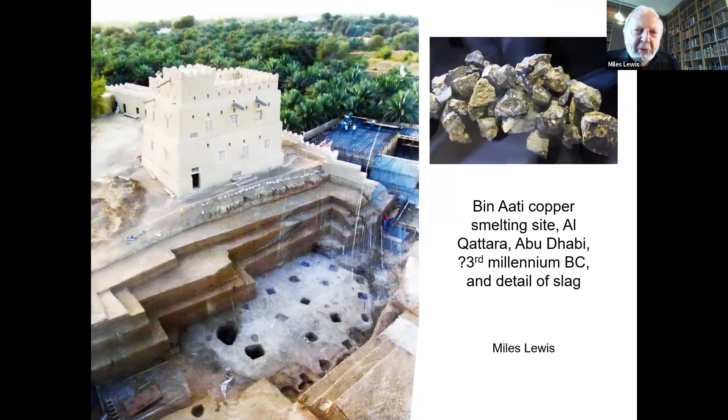But the next step is making bronze. Bronze uses copper and tin, but it's harder than either of them—that's the benefit of it. Whereas copper could hardly be used for anything much in the way of tools, bronze could be used for tools and weapons. So the first thought somebody would have had was not to do with buildings, it was to do with how to improve weaponry, maybe jewelry, some utensils and so on.

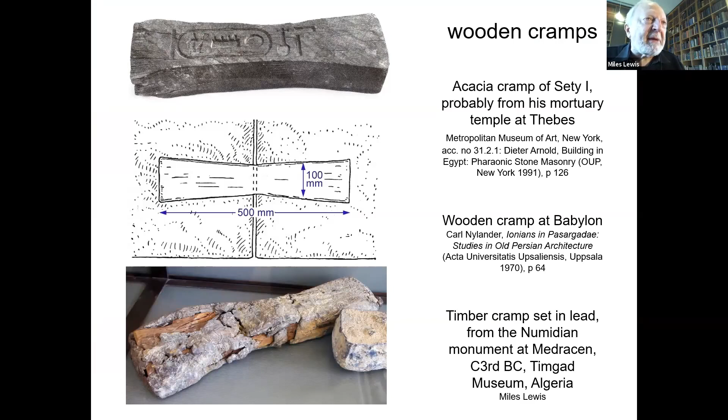And here's where metal was first used in building. Stones were joined together by cramps—those double dovetail shapes—which at first were done in timber. There's a timber one at the top, and they sit into the recess there, so the stones couldn't pull apart. Around the timber was run lead, so you got a tight fitting. In fact, the use of lead in building was perhaps the pioneering use, and that's probably what gave rise to the idea of using bronze in these locations, because the timber cramp might then be replaced with a metal cramp, possibly with other shapes.

And you fit it tightly by running lead around it. So this is the idea people would have had about what metal was for - no idea about it being something you could use in tension or to beam or anything like that. It was only gradually that the implications arose.

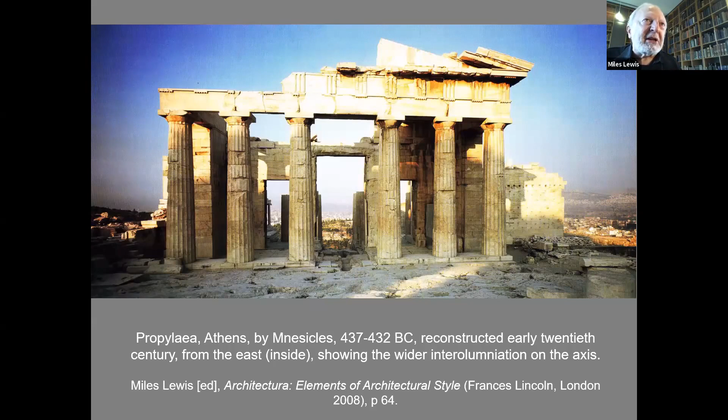Bear in mind, to go back again, what we saw was a reconstruction - the whole place was in ruins, rebuilt mostly in the early 20th century. So we don't know exactly which stones are right. You can't go to one stone and say this is how it was in this place. There's been a certain amount of supposition about what went on here. Those stones were put back in place on this side, the inside face of the Propylaea.

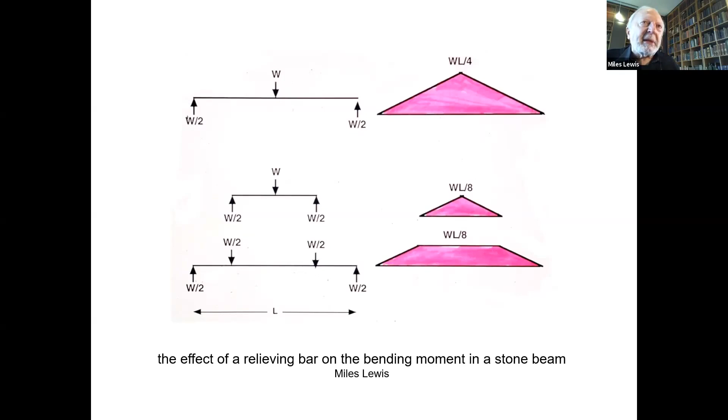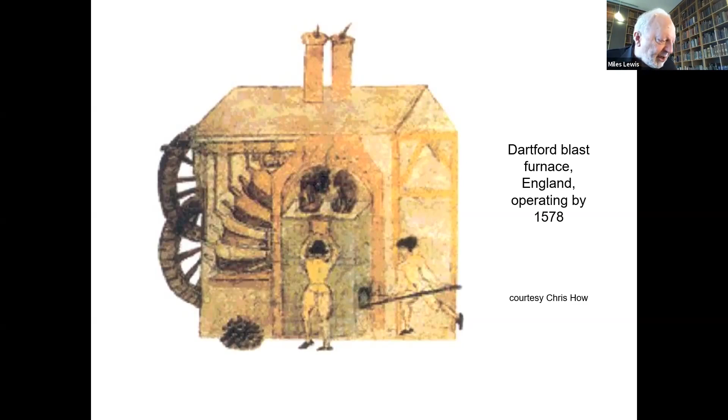The next development is the blast furnace, where you force a blast of air through the furnace and achieve greater heat. Because of this greater heat, you can produce fully melted iron, which is poured off and becomes what's known as cast iron. Now I need to explain a little more about the different sorts of iron.

Cast iron is what you get straight away by melting down the iron ore, and it's not refined—it's got impurities in it, up to 4% carbon and maybe all sorts of other elements like silicon. It's poured into a mold, like pouring out a block of chocolate, and it sets in the shape of the mold.

It has a crystalline texture, and it's good in compression but not good in tension, which means it's not good in bending either, because bending involves tension. It's also brittle, so if you have a fire in a building made of cast iron and hose it with water, changing the temperature, suddenly the iron pieces will collapse. That's cast iron, the basic cheap iron you get first of all.

Wrought iron is where that iron is worked by a blacksmith or a rolling mill. You hammer or roll the iron, and as you work it, it gets a fibrous texture. It becomes good in tension and good in bending. The only problem is it's much more subject to corrosion, to rusting, than cast iron. But wrought iron is much more general use for structural purposes.

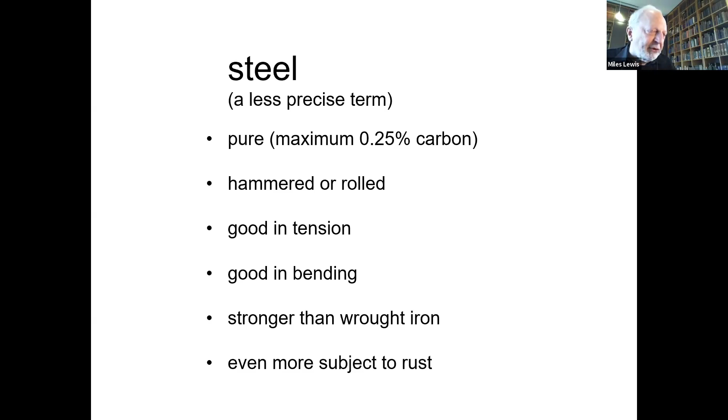Then the third thing is steel, which is a bit hard to define. It's more like wrought iron—hammered or rolled, good in tension and bending, but stronger than wrought iron. It's even more subject to rust. It involves various additives, and steels were made by different recipes over time; I won't try to define those more precisely. But essentially, by the late 18th century, you could have cast iron, which was cheap, or wrought iron, which was expensive, and that's what was first introduced into buildings.

The buildings it was introduced into were two sorts, really: the factory—the first factories—and iron bridges. I want to turn to the factories first. The factory was a new idea, the heart of the Industrial Revolution, involved in the rise especially of the cotton spinning industry and some other industries like flax.

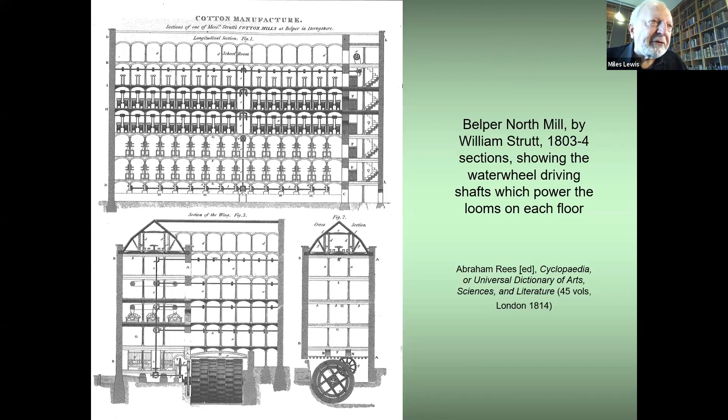Here's another one, and you can see here, looking at the bottom sections, the water wheel which operates the whole thing. More clearly above, you can see the shafts which power the machinery above. The other thing you can see, if you look at the left-hand bottom section, is the arches in the roof. Now, the big issue here was fireproofing.

In the year following that, about half a dozen factories and mills in the north of England were also burnt out. So suddenly, fireproofing became the major issue in the design of factories, and that's what generates the developments in William Strutt's mills at Derby.

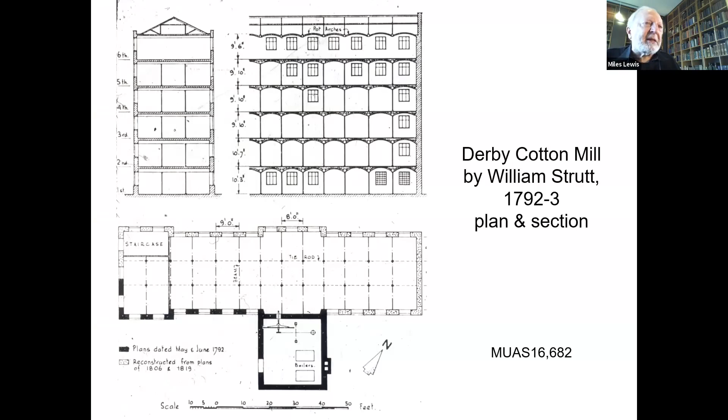There are three of them. This is the main Derby mill, not unlike the other ones we've just seen. In this case, there's a steam engine at the bottom, where the boilers are in the bottom picture, the black shaded bit, but it otherwise works in the same way as the water-operated factories.

As I just described, these arches would have all been in a row, but there was only an ordinary wall at the end, so they would have actually flattened out and spread, and the whole building would have collapsed if it hadn't got that iron tie rod.

The tie rod is the key element here, or two elements actually. The tie rod is of wrought iron, not cast iron. The other piece of wrought iron is the sheet metal over the timber fillet. So all the big pieces are cast iron, but the small high-performance pieces can be wrought iron.

What's the problem in this system? Why is it not fully fireproof? I've got all the time in the world. Well, the rod is exposed, isn't it? Yeah, but you're cheating, you know this, Giorgio. Oh, okay, sorry.

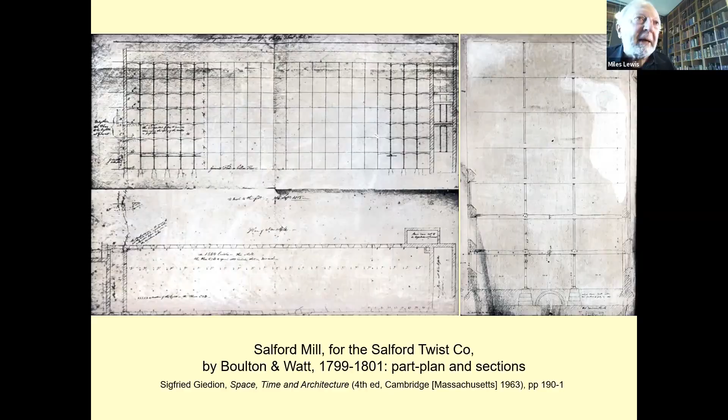If you look at the section on the right, the beams aren't a strictly parallel or uniform shape. There's a rather odd system—there seems to be a change in profile, and in the middle span you can see the black mark where the beams seem to join together. So the beams are, in fact, 1.5 spans each, and they differ in depth as they cross. Why is this? It doesn't make sense.

Well, if you take the beam over 1.5 spans, you actually get an improvement in spanning capacity because it has a negative bending moment over the span. If you draw the bending moment diagram, you reduce the bending moment in the beam, so that's in a way quite a good thing. They've also got some sense of what the bending moment is doing, because the beam is deeper at the middle of the span. But they haven't reacted to the negative bending moment at the column.

The other thing is that they incorporate into the beam itself the skewback, the element to support the brickwork. At Shrewsbury, the one we just saw before, those beams had a sloping bottom. So where previously in the first mills we had a little bit of timber wrapped up in iron, the iron beam is now shaped so it can take the base of the brick arch. In this next mill, Salford, there was a little bit of that slope but also a little flange, so the brick rests on the flange as well. But that was scrapped—in the end they just used a sort of long T shape, so the brick relies upon the flange to support it.

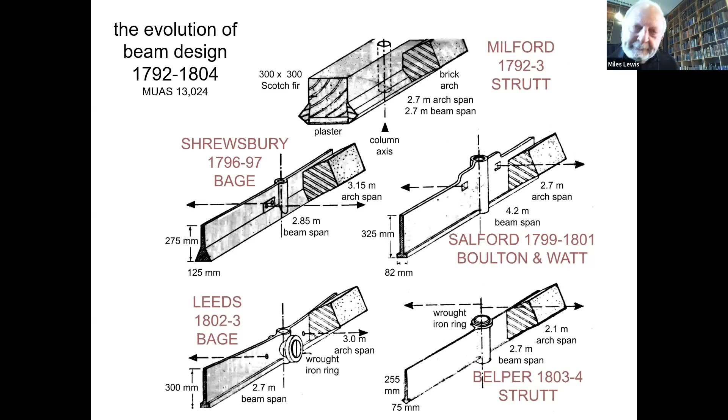The other thing happening, if you look at these diagrams, is the dotted line for the tie rods. By the time you get to the bottom one, the tie rod at Belper has been raised right up above the arch, and of course that's to stop it being exposed to fire. There again is the evolution of those beams, more and more towards what we might regard today as being perhaps a more scientific I-beam.

Now, the other topic I wanted to mention was bridges.

Well, sorry, can I interrupt before you go on to bridges? Just a fascinating topic, by the way. Back on the previous example, so we start to see the development of the I-beam.

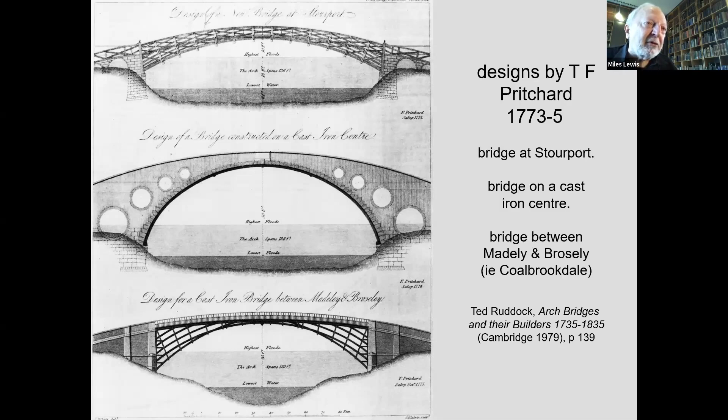I'm stressing this because these ideas from stone bridges and wooden bridges come to inform the first design of iron bridges, because people are traditionalists. They can't think of a new form straight away. Now Pritchard at the bottom proposes quite a good bridge. Although the bars are curved, they're not very heavily curved. He's obviously inspired by the timber bridge form at the top, but he didn't in the end get the job. It was passed on to another person.

And there's those circles. Now the circles there, what sense do they make? They're not circles to release the pressure or substantially reduce the load. It's just out of the tradition of stone bridge building.

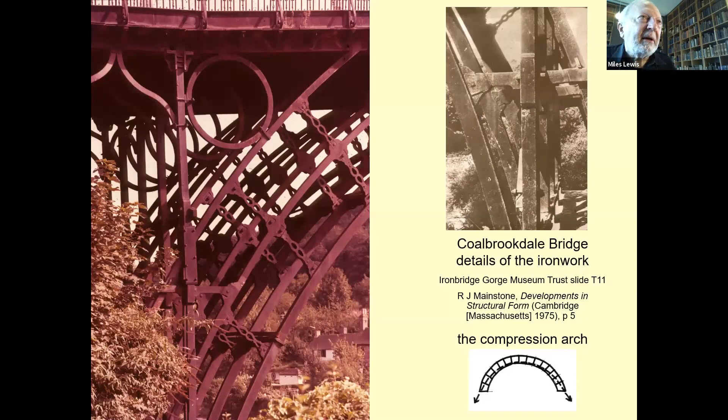But that's the first of the iron voussoir bridges. Now the voussoir is in the stone arch, the wedge-shaped piece of stone which makes up the arch. An arch is made up of a number of these voussoirs, these blocks of tapered stone. And the iron bridges tend to do the same thing. So that last one we can see as being like if you made a number of blocks of stone into an arch. Those separate units are like stone blocks in principle.

Now it's a cast iron bridge with curved bars, but because they're all joined together, it's not such a problem as the Coalbrookdale Bridge we saw before. It's a bit more rational. In fact, it may not all be cast iron. It seems that some of this might have been wrought iron, and I'll tell you why in a moment.

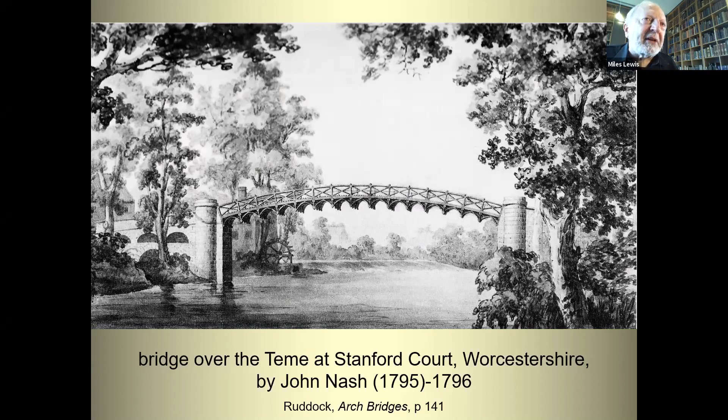This, though, is a bit more of a joke, really. This is done by the architect John Nash, for a private property. You can see it's meant to be a cast iron bridge for sure, but it's a rather quaint structure. In fact, a few hours after it was built, it collapsed, although it did get rebuilt later on. But Nash claimed to be the inventor of the voussoir principle, not exactly in this bridge, but in other ones later on. He proposed cast iron boxes filled with concrete to be made into bridges.

These bridges were over rivers, and rivers were the main commercial connections through Britain. There were no railways, and the roads were poor. Goods traveled by water if possible, either on the rivers or on canals which were built for the purpose. So whenever you built a bridge on a major waterway, you had to allow enough height for the shipping to pass beneath it. If you're in a port, it had to be for sailing ships. Inland, not so much.

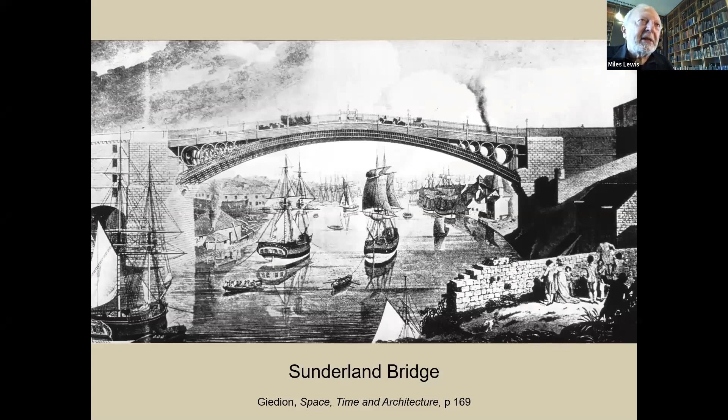Now a different topic. I mentioned the canals. The canals gave rise to the need for aqueducts, that is, to carry the water across valleys. The idea of a canal is you want to transport your goods as near as possible horizontally across the country. So you had to make tunnels where you needed to, and bridges where you needed to, to keep the canal horizontal. If you couldn't do that, you had to have a system of locks where you changed the water level, and boats had to be floated up to the top and down again with great labour. So there's a great incentive to make a canal horizontal.

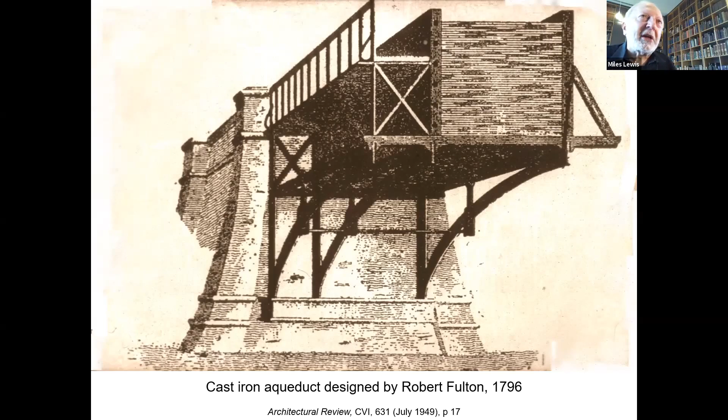You know how canals work. They're barges full of raw materials or goods which go right across the country, and they're not worked by a motorboat, they're not worked by steam, they're worked by what pulls the boat through. Yeah, they're pulled by horses, and that's the tow path on the left on which the horses walk, so it's a critical part of the design.

And he saw this as a new invention. He described this as, let me find the words, a principle entirely new, which he was endeavouring to establish with regard to the application of iron, trying to get other engineers to adopt. So somewhere in this design, he thinks he's invented something rather important.

You think so? Well, not really, because once these are bolted together, it becomes a continuous beam. So it's in fact a continuous cast iron beam, which is not really a good principle at all. Bolting it together probably weakens it. So Telford was mistaken. But Telford is nevertheless one of the most advanced engineers of his time.

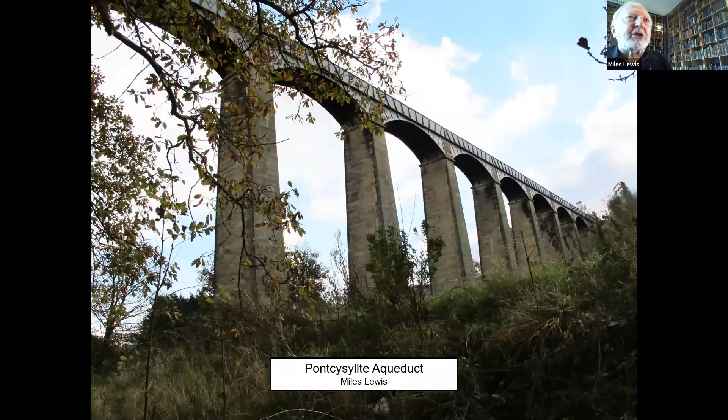He does some of the best designs, especially of bridges. That's a close view of that. And here now is a much larger scale one. That previous one, the Longdon Aqueduct, was more or less a dress rehearsal for this, which is a wonderful structure in Wales. So there's the towpath on the left and the canal on the right. And there's the system. Now, it looks as though you've got this supported on sort of solid cast iron arches, but that's just cladding. The bottom part, the sheets and the spandrel of the arch are just facing. And the system inside is again arched ribs, which doesn't make all that much sense still.

And this was actually begun, work was begun on the banks on either side for the abutments, but in the end, for financial and other reasons, it was abandoned. So it's just a beautiful idea that never got carried out.

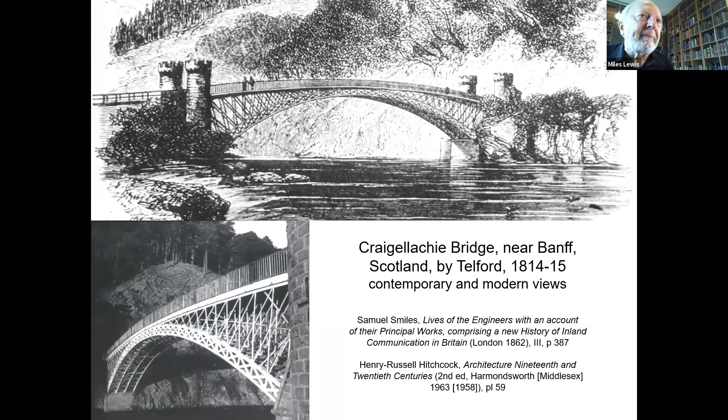And he built a number of bridges on essentially this sort of model. This is the Craigellachie Bridge in Scotland. And some interesting points arose here. It's assembled again out of cast iron, and you can see below the detail of it. And he raises some issues in writing about it at the time.

He makes the point that you should, doing this, have all the elements of the same thickness. Why is that important? So all those bars, he thinks, should be the same thickness. Any reason for that? Like same structural load? So like, does that mean like same structural load, like there's some sort of even structural load or something?

Not so much the load, no. It's because these are cast iron, and if you put it together and you have different thicknesses, after it's cast, it's hot and it shrinks. And as it cools, it shrinks. If it's different thicknesses, it cools at different rates. So the casting ends up with stresses in it. That's the reason for that. Quite sensible, in fact.

And so he criticises other designers who use bars of different thicknesses. He also criticises the use of rings in the spandrels. He's the first person to say those circles we saw in the spandrel of the bridge are illogical. You could tell that they were structurally wrong.

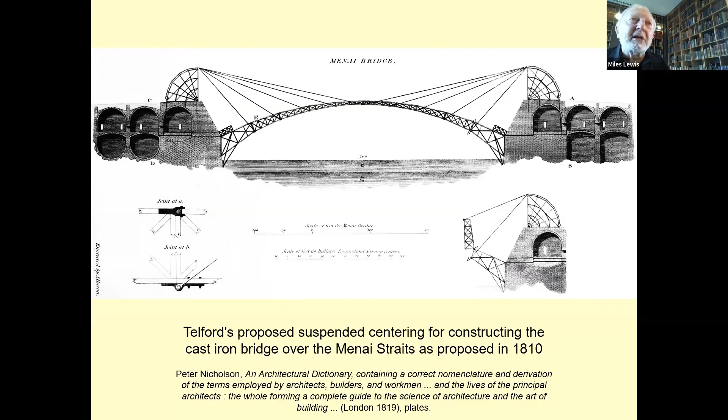Well, I hope you could, because it was done here at Hell Gate Bridge in New York, and it was done for Sydney Harbour Bridge in Australia. So he was on the money there in developing that system.

I now want to turn to suspension bridges, which rely, of course, not on compression, but upon tension. And of course, a very big change in principle. What does that mean in terms of the material for a start? The material of the bridge.

You're never going to make it. No, I'm not going to use cast iron for a suspension bridge. That's the point—it's no good in tension. So you have to use wrought iron. That means you're using a more expensive material, but usually much less of it, so it may be economically possible to do it.

So those are the two principles. The compression arch exerts a force on the abutments—it has to be held in. If it can spread, it's no good. The suspension bridge, on the other hand, has to be tied in at the abutments, anchored in on either side.

Here's an early example. I'm showing this one because those arches at the end, those quadrants, are rather like what Telford was proposing for his erection of the Menai Bridge. This is designed as a permanent way of taking the tension of the cable down into an anchorage at the end without taking it right out to either side, so it can be anchored straight into the stone abutments below.

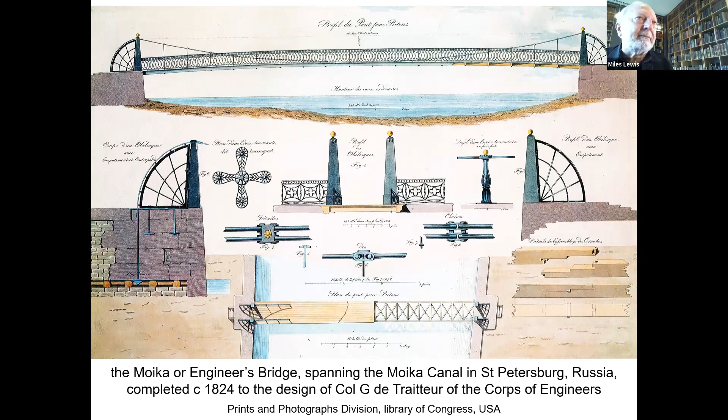Huge links in the chain. These are not made in one piece—each of those bars is actually 16 square bars put together, bound by wire and then partly welded and hammered together, to make these giant links, which are the tension elements in the chain. Here are some details on them.

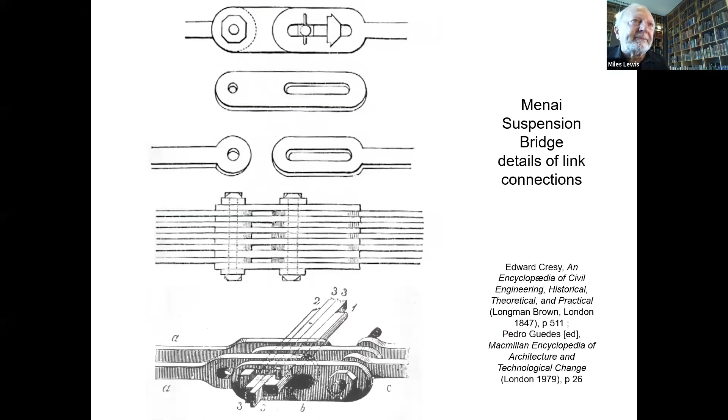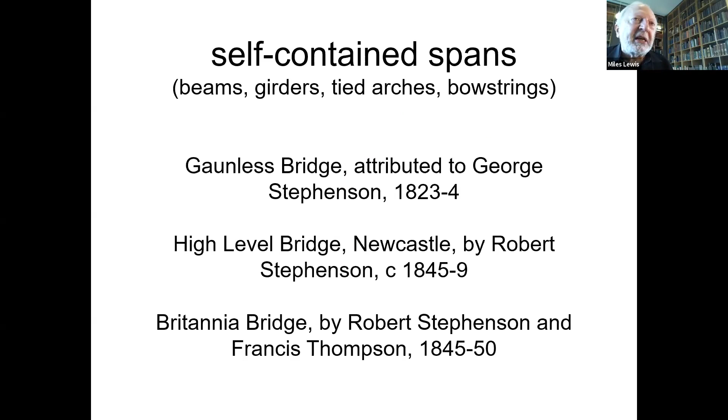Now the last category in this group is the self-contained span. We've had the compression arch and the tension bridge, but this is just like a beam, where you have a simple piece that runs across and doesn't exert either tension or compression on the abutments. That's the difference in principle.

So those are the three diagrams. The bottom one is just a simple beam, though it may take all sorts of different shapes to get that beam effect. But the point about it is you can pick it up and put it down—you don't have to rely on anchorage or support at either end of the bridge.

It doesn't come early on. The idea of a simple beam is not at all obvious to engineers. Why is that? Well, the only large-scale beam you could make would be cast iron, and cast iron is not good in bending, so it wasn't an obvious solution for bridges at first sight.

The first bridge of this sort is, in fact, a very odd structure. It's built over one of the first railway lines by the engineer George Stephenson, who was mainly a railway engineer—he was the inventor of the Rocket, the famous first locomotive. This is his bridge over a small local river, the Gaunless.

And here it is in the York Railway Museum today. It consists of a series of downward arches—downward cables, I suppose—made of wrought iron. Cast iron pieces, like the balusters of a staircase, run upwards in compression to support the deck of the bridge, which makes a sort of sense.

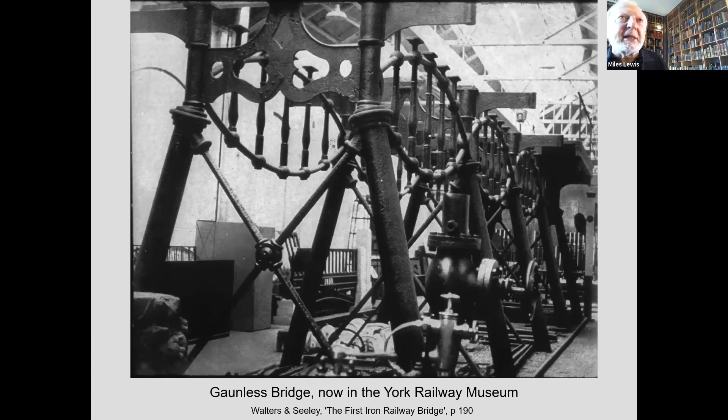But very surprisingly, there's also an upward arch, which is also wrought iron. Does that make any sense? Let me go over here. Here's what you're seeing—what would be the point of having the upward arch in that system? The downward arch is simply in tension, and the verticals carry the deck on top of the bridge. That makes sense. The upward arch does nothing.

Well, with railways you're dealing with a particular problem. A railway engine is a large moving load—you're not looking at a beam with a simple span of load in the middle, the load is moving across. When the train goes from one span to the next, the first span goes into negative bending moment, so that arch resists the negative bending moment. Stephenson couldn't analyse that with real sophistication, but I believe that's what it does—it supports the arch when the locomotive is on the next span.

Now, when you put all this together, especially with a giant piece of timber on top, it really becomes, in effect, a single beam. So that theory probably doesn't really have much application, but I think it's the idea behind it.

A more sophisticated form of the same sort of idea is Robert Stephenson, the son of the engineer George Stephenson, himself a prominent engineer, does the high-level bridge at Newcastle in northern England. It's a bridge which has a level for the roadway at the bottom and the railway at the top. It's a two-level bridge. Now, how does this work?

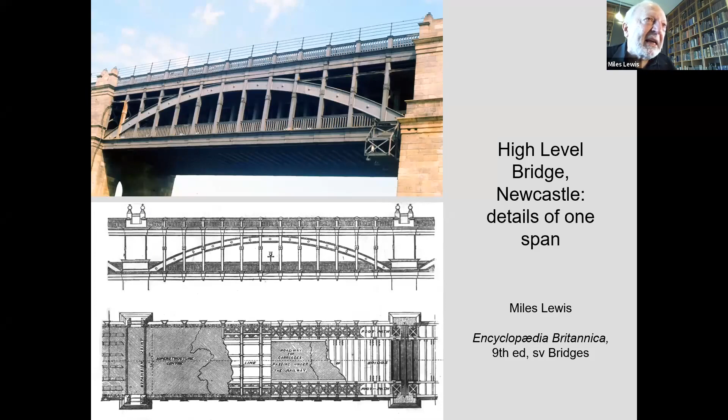The arches, they're not going to push out at the end of the bridge, because each arch is tied. It's tied in what's called the bowstring fashion. So each arch is separate. You could take one of that arch and replace it without the bridge collapsing. You can see the vertical elements are like balusters - they're cast iron, they're there just to carry the vertical load. The arch itself is now wrought iron, and the tie element across the bottom is wrought iron as well.

And then you get to a true beam here with the Britannia Bridge in Wales. Now, instead of having all those funny arches and ties, the whole bridge is made like a beam, like a box beam here. And it's by the same engineer, Robert Stephenson. It's what's called a tubular bridge. It's so big that the trains go through the middle of this solid beam. And there it is - it was demolished only in fairly modern times.

Extraordinary structure. The question is, how do you build a thing like this? How do you get that into place?

First of all, the benefit of that tubular beam across a number of spans is you get continuity, which reduces the bending moment - so you get the top diagram. If you put each beam up separately, each section of the bridge up separately, as separate beams, you get the bottom - so you're losing all that benefit. So how can you get the benefit of the continuous beam at the top? By assembling these separate beams as at the bottom.

It was done with great ingenuity. That's the question I'm asking, sorry.

What Stephenson did was to put, say, the beam from C to B in first. It begins to deflect. He works out the slight angle at the end, joins the next beam on at that angle, and then lets it rest down. And then at the end, he does the next one, ED, the same way. So each one's joined on, taking account of the existing deflection of the previous beam. And it becomes, in effect, a continuous beam. It takes up the shape it would have if it was made in one piece first and then all put on at once. Very clever.

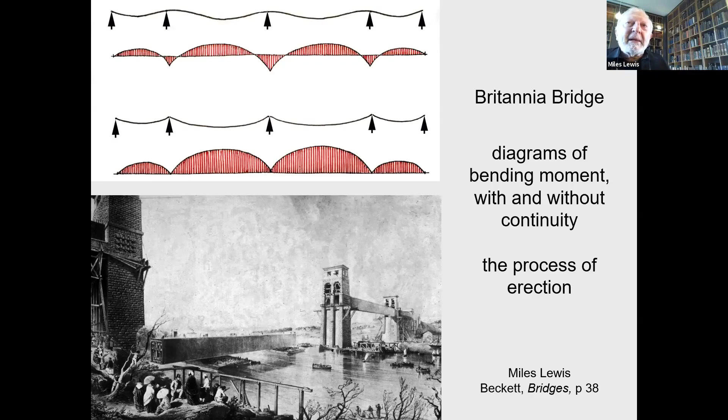What I would say is the previous design for this site was that suspension bridge. The problem with railways was the moving engine - when they proposed to take trains across on the suspension bridge, they decided to unhook the carriages, take the locomotive across, take the carriages across drawn by horses, and then join them up again at the other end to deal with this problem of the moving load. With the tubular bridge, of course, it's not a problem at all - it's a continuous solid beam, and the railway can go straight through without any issue.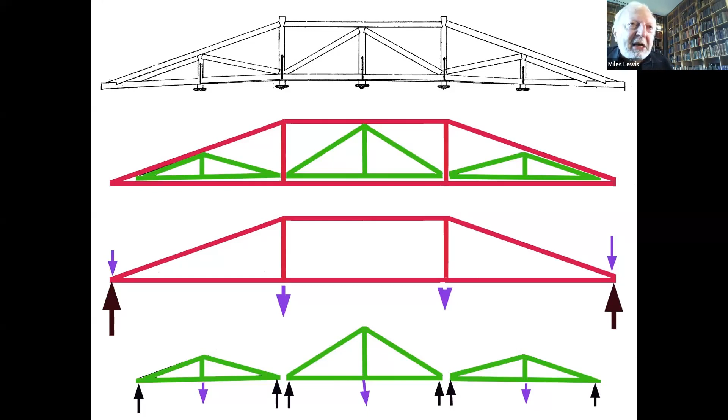I discussed before how this is made up really in a logical fashion because the deck of the bridge has cross beams across it, so it's in 6 panels. Each beam rests upon this truss, and if you take the red shape, the panel points support 2 of the cross beams, but there are others in between, so you need to make a little truss in between to support the beam at midpoint. So the whole thing is a little overlaid system of queen post and king post trusses, which is a totally logical response to the loading conditions.

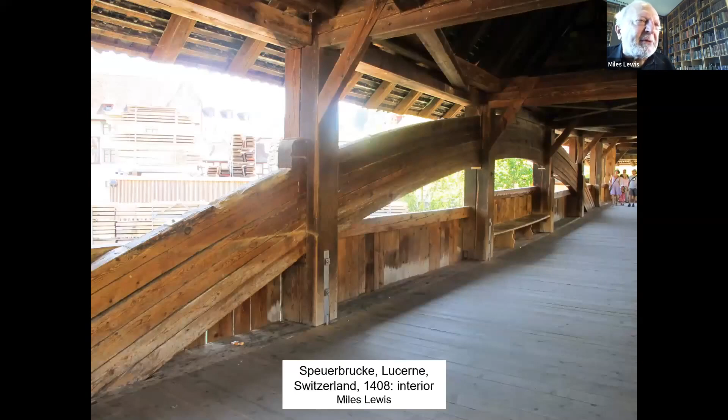Here now is a bridge in Switzerland. You can't make it out very clearly, but it has within it arches of laminated timber, which were slightly later but inserted into this bridge. There, you see the principle there. We've talked about laminated timber, and here it is physically laminated, not steam bent or anything, but just joined together to make the arch, bent in parallel to make the arch.

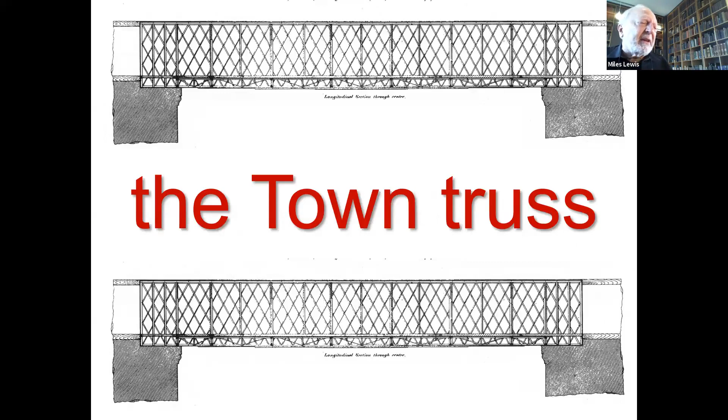And then you get attempts to make trusses to deal with this problem. Now, this one here is a very small scale truss I'm going to introduce here - this is in a house, the Governor Thomas Bibb House in Huntsville, Alabama. And the roof trusses have been placed - instead of having a truss across the roof, there are parallel trusses like girders along the roof so that you can get a room in the roof space without being interrupted. So there are parallel chords there, made up of timber. There they are - simply fairly crudely sawn timber, nailed into place.

And this is the invention of the architect of this house, Ithiel Town. It's called the Town Truss as a result. Is this a good system? Will it work? And if so, why wouldn't it have been done before?

Well, it does certainly work. The reason it hadn't been done before is it involves a large amount of sawn timber and a very large amount of fixings. And what's happened in North America is they've developed sawmills, so timber is much cheaper to saw than it was, and they've developed nails, so that number of joints is no longer a big problem. And that's the basis for this technical development.

Anyway, the Town Truss is now used quite widely in bridges. In North America, you get these covered bridges - that's a bridge with the roof on because of the snow, a pretty North American thing. That's a version of the Town Truss. This one again.

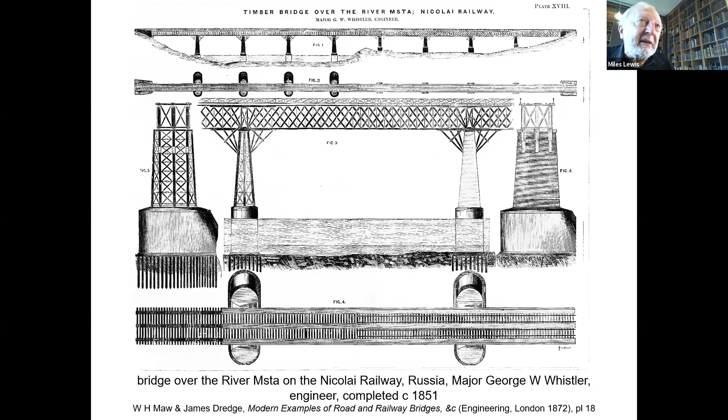And this one now in Russia, done by an American contractor. And then they turn them into iron, mostly wrought iron. This works well with the problem of trains moving as a movable load over the bridge that continuously shifts the point of maximum stress. Yeah, exactly the same thing, almost like a beam, the same sort of thing.

Now fully wrought iron in America. The Howe truss is a bit different, more scientifically designed. It's a crisscross design, with vertical elements in wrought iron, and the crisscross elements are, at first, timber compression members. It might seem illogical, but it works, especially when the loading is variable. If the train goes across, the load isn't at the centre, it's somewhere to one end or the other, and therefore these uniform panels work fairly well in dealing with that.

If you had a simple load at the centre, you'd change that truss to what I've shown at the bottom, taking out all the extra members. It's only because you might have an asymmetrical loading condition that it's worth having the complete truss design at the top. But looking at the bottom, you can see how it actually works. You've got the compression member, then the tension member hanging down. The verticals are in tension, the diagonals are in compression.

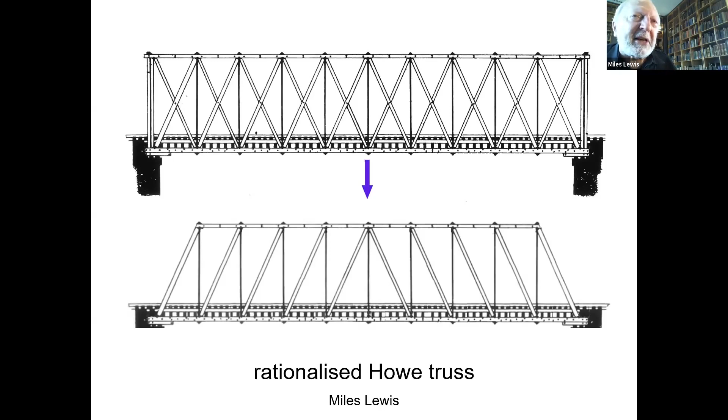Here's one built near Melbourne very early on, in 1853, using that system. Here's one done not in timber at all, but all in iron. Sometimes in these trusses you can't tell which members are supposed to be compression and which are tension, especially if you make the bridge in iron - are the verticals in tension or the diagonals in tension? You may not know, but here's another one near Melbourne in the late 19th century on that iron system.

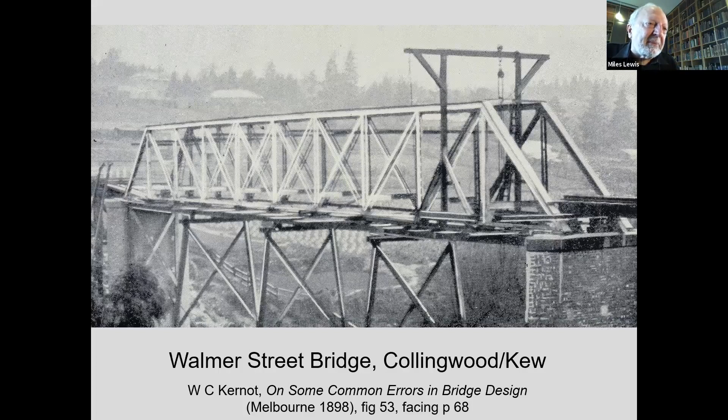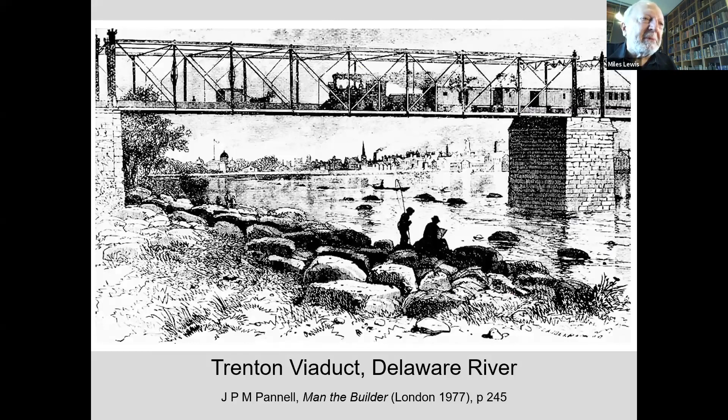There's an example of one of these. The middle is a rotating span, for the shipping to get through. So commonly in these big bridges, you have to have a span which revolves in the middle to open like a gate.

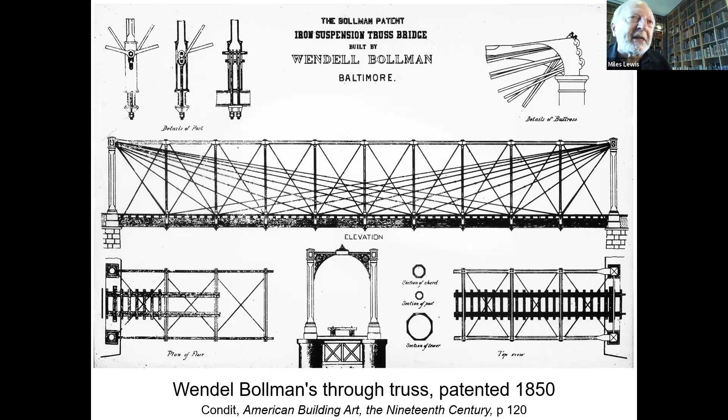And then this seems even madder, the spider web of stuff - the Fink truss, so-called. Is it mad? It's actually precisely the same logic as the way I analysed Palladio's truss before.

You've got a big span, which is trussed up from the bottom of the top diagram, so it supports the centre of the truss, but the loads are coming down on the cross beams where the black arrows are. So you've got to have another little truss to support the sort of third point load, and then within that, another little truss to support the next one. So what you've got is a quite logical structure, and you can analyse the stress in each separate member quite clearly. So it's actually quite a good system.

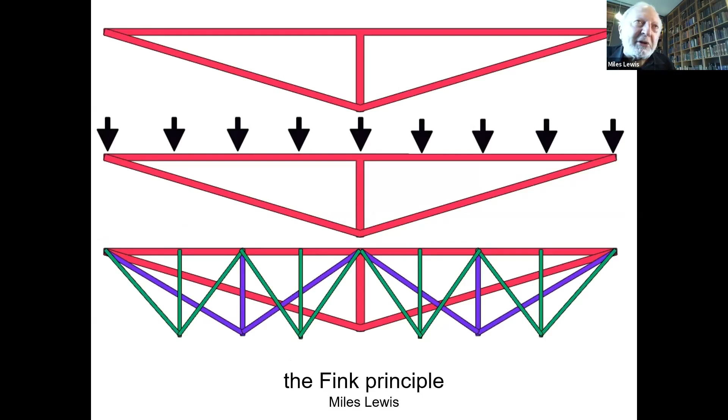Now, the final example here is the Warren girder, which is a sort of much more rational girder in our terms. What happened was about the middle of the century, two engineers worked out how to analyse the stresses in parallel chorded girders. So you had a sort of scientific basis for working out the load in a girder.

One of them was Kennard, who designed this bridge, and the other was a Russian engineer about the same time. This is the Crumlin Viaduct, which is this bridge in question. It's in Wales, a viaduct for taking a railway line across a big valley.

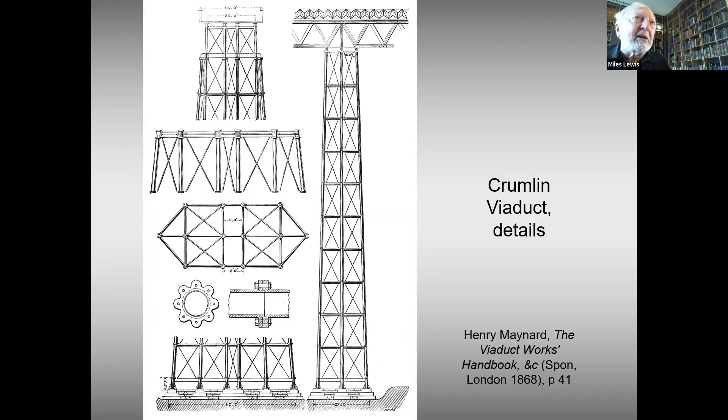And the important point is at the top of the picture, the zigzag truss. So there's no vertical members in it. They're 60-degree members, and it's totally reversible, so you can put that upside down to be the same truss. So you still get trusses. You can buy trusses like that from a supplier today to make your own garage at home. It's a very efficient system.

Now to turn back to conventional building. First of all, the I-beam we talked about before, how you produce those shapes. The ones we saw before were cast iron beams. We can just make any shape you like in casting.

Miles, here we're talking about wrought iron I-beams, right? These are wrought iron, yes. Which incidentally, the process is still the same, rolling for steel in principle. Same thing, we'll come to steel soon, yes, it's the same thing for steel essentially. Yeah.

Here's one of the first deliberate uses of an iron beam in the Palm House at Kew outside London, which is a big greenhouse. Unfortunately, it was destroyed in a sort of hurricane in England about 20 years ago, and most of it has been replaced. But the beams, the arch members were in fact I section members, and the engineer, Decimus Burton, was quite knowledgeable. It was done on purpose.

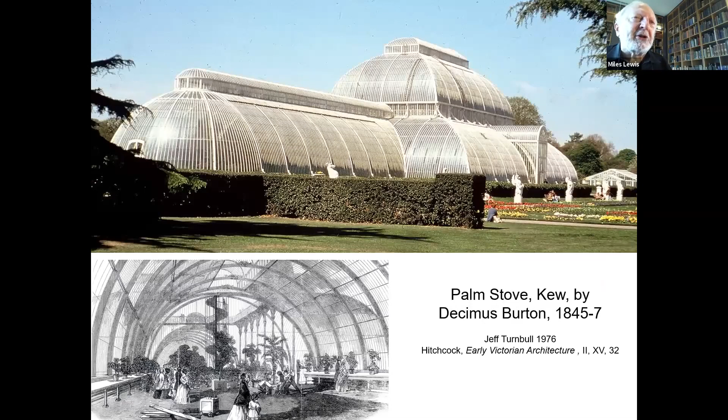And what happened there, in fact, was that it had first been proposed to build this in cast iron, and Burton proposed to use wrought iron at much greater expense, but more durable and much lighter, and was allowed to do it.

And now I'm turning back to the United States, where...

Sorry, back to the I-beam. At what time do we find the use of the I-beam in a self-aware way, as a structural member that resists compression and tension? Well, in this building I'm just about to turn to. I don't mean they could necessarily calculate it accurately, but they certainly understood how it functioned structurally.

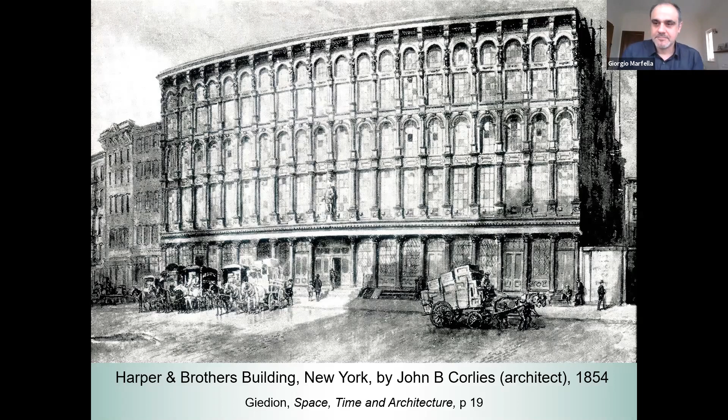Here again is the use of built-up members. You've got a rolled beam for the small section at the top left, but everything else is built up with bolts. This becomes typical construction through the rest of the 19th century. Cast iron columns remain for a surprisingly long time in major buildings, even skyscrapers, but wrought iron quickly takes over for all bending members, beams and girders. The other element here is the crush box, where you join the beam together. It's a complicated joint, so a special cast iron section is made into which everything fits, so you can transfer the loads from the beams to the columns.

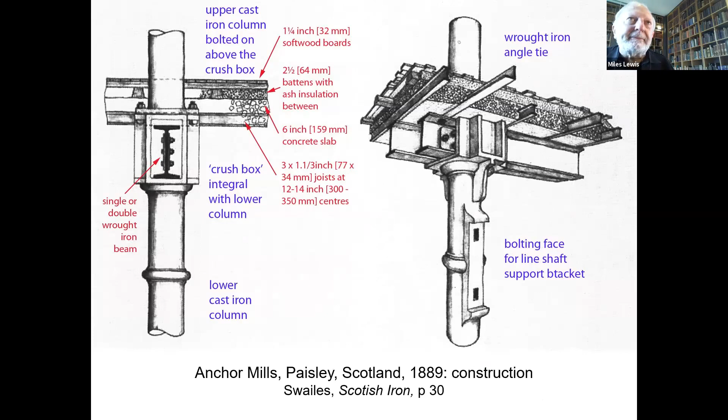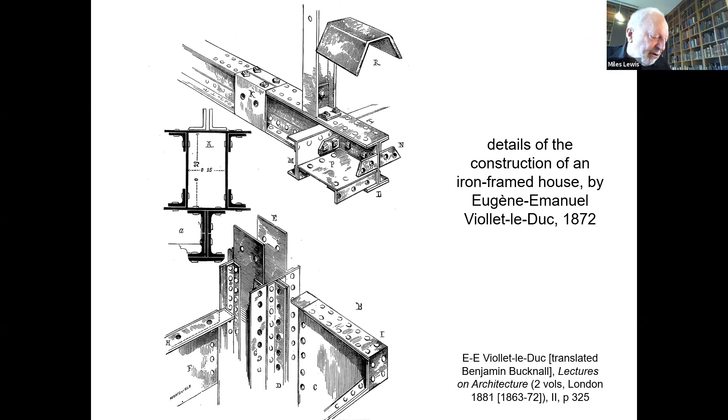This is the French architect Eugène-Emanuel Viollet-le-Duc, and this is very much like what standard construction would be in the 1880s to say 1900 or so in Europe. Here in Australia, the same thing exactly.

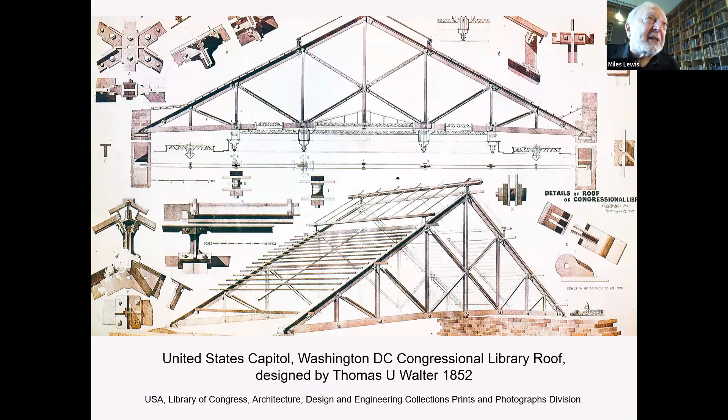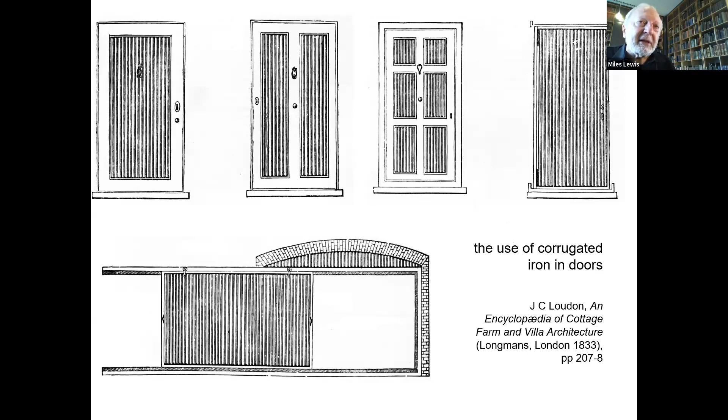This is Henry Robinson Palmer, the British engineer who took out the patent for it, proposing to use it for the roofing of buildings for the first time. Also for fireproof doors, including that rolling door for a warehouse. But most of all, Palmer uses it at the London docks to roof these large dock areas.

So corrugated iron—if you picture a sheet of ordinary flat, lightweight iron, and you put it across a span, say between two chairs, and stand on it, it'll just collapse. Take the same sheet and corrugate it, and it will take quite a load. If you corrugate it and then arch it as well, it gets even stronger. It's a very strong way of using iron of a given thickness, so an ordinary sheet of iron.

If you make a very big arch, you might have to put some more tension rods in between, a vertical rod in the middle perhaps, say, and a subsidiary tension rod. It's a great system. Palmer sold his patent rights to a man called Walker, and they began to be promoted, this iron system began to be promoted mainly from 1843 onwards in Britain.

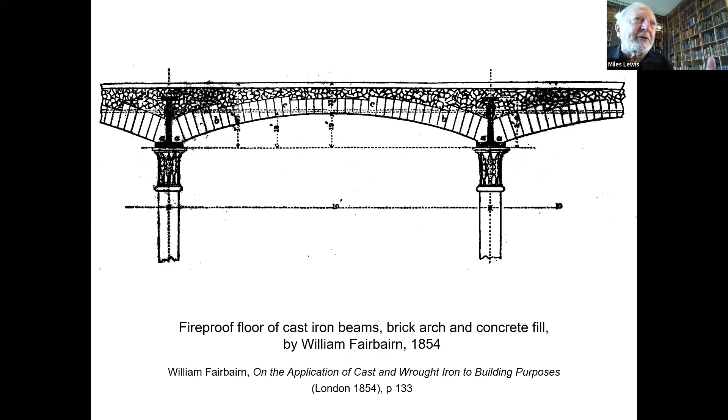Hein, Lehmann and Company of Berlin developed this structural iron, first of all, but also for fireproofing systems. They took what would be ordinary corrugated iron, instead of a sine curve, they have a semicircle at the top, a semicircle at the bottom, and a straight section in between. So it becomes a very, very deep corrugation. And some of it's made very thick, the one in the middle, so it's a very, very strong element.

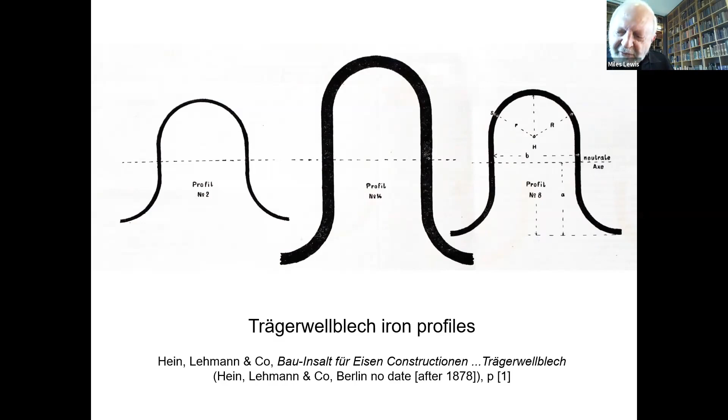And they use it to support floors. So no secondary structure at all, just the corrugated iron straight across, bit of concrete and wood on top, and you've got a complete floor. This is Trägerwellblech, load-bearing iron, developed mainly in the 1870s by this German company.

And it's interesting to me because it's virtually unknown in Britain and the United States, but it's known in Holland and Belgium and in Germany, and it's known in Australia because a German engineer introduced it into Australian buildings.

But here it is being used in Melbourne. See the arch iron at the back of the picture? That's this Trägerwellblech iron. The concrete on top.

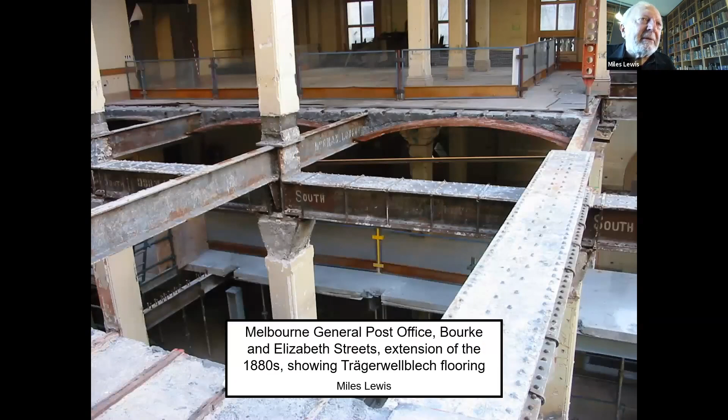Okay, well, the triumph of French engineering at the end of the 19th century was quite major, and mainly due to Gustave Eiffel. Gustave Eiffel, of course, you all know because of the Eiffel Tower, although really that was not designed by him himself, but by one of his staff. But he is nevertheless a very important engineer.

Before he built his major bridges, the largest iron arch in Europe was the St Pancras Station arch in London, which had a span of 73 metres, and remained the largest for about a quarter of a century. But it's worth thinking about how it works. First of all, is it a true arch? And secondly, if it is a true arch, what stops it spreading?

Not a true arch, is it? It's not a true arch exactly, because it's got hinges in it. At the top there's a point where the members can actually rotate, and at the bottom also they could rotate, so there's actually 3 pins, 3 hinges. It's more like a triangular structure in a way, it just happens to be curved.

And how does it stop from spreading? The same issue arises whatever form it takes, it has to be stopped from spreading. It's stopped by having horizontal members below the railway tracks at the bottom. If you look at the bottom of that picture, the horizontal beam right at the base goes below the track, so it's tied together as you might expect.

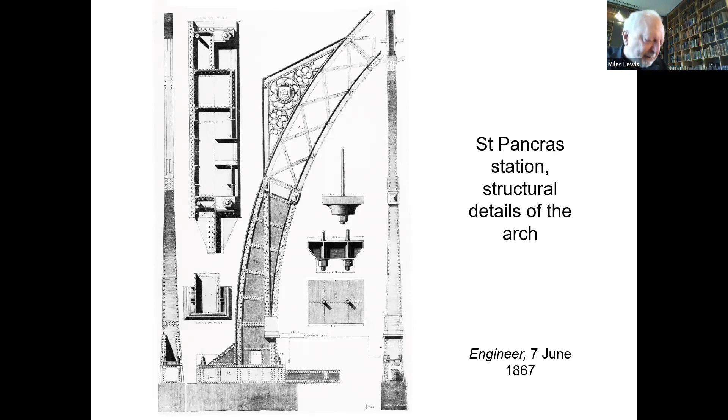So the railway station had 3 pins, which means you could break it down completely. You could analyse at a large scale the forces in each major section of it. In this one, you can't. It's a compression arch, but contained at the bottom, and you can't work out the stresses within it. It was felt somehow to be more secure for railways and loads like that than having a 3-pin arch which could be analysed. That's why these ones were often built.

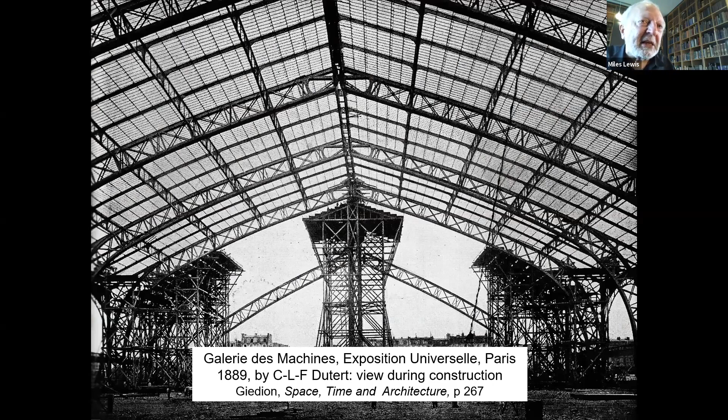Now, turning to the 3-pin arch, here's an example in France, not by Eiffel, of course. This is the Galerie des Machines, the machinery hall for the Paris exhibition of 1889. You can see there that the members are really separate members being hoisted up into place, and they have a hinge in the middle and a hinge at either side.

There's the hinge at the bottom. It's important to make it work. So these are really quite carefully designed to allow rotation for it to function in the way it's designed by an engineer to operate.

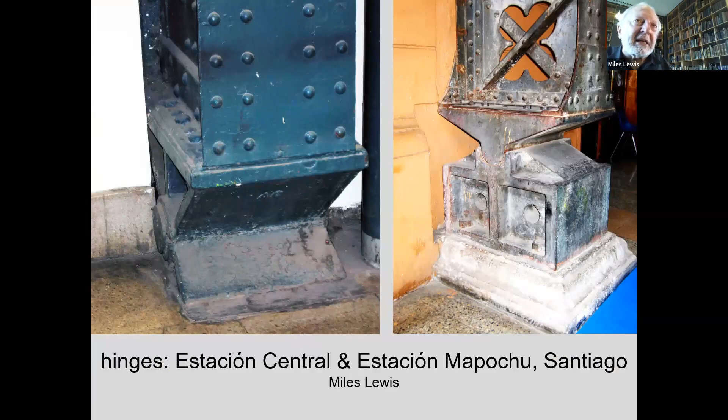And here's an example which is often attributed to Eiffel, but incorrectly so, in Chile, the central station at Santiago. And another one in Chile, same thing, 1905 to 12, a bit later in date. And there are the bases of the two arches, again carefully designed to allow the free rotation at the base. An illustration of one at that time.

Now, turning to steel. Steel so far has been quite widely used for quite exotic purposes, for various sorts of machinery and so on. Even cast steel, as opposed to rolled steel, was being used. But in structural terms, it was an expensive material, not introduced until quite a late stage.

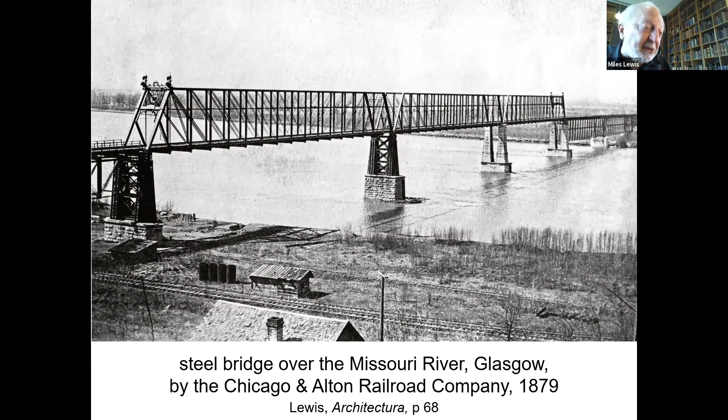Miles, can I have a question? I can't hear you terribly well. Why is it like what? Sorry, why does this bridge need support from both the bottom and top?

I still didn't hear properly, but let me just say they've designed this so that the major elements can cantilever out, and they don't have to build an arch across in a conventional way. They've hung onto the end of that this little short beam to provide the clearance. Now, I don't think that's your question though. What were you trying to say? I can't hear properly, so if Georgia can hear it and tell me.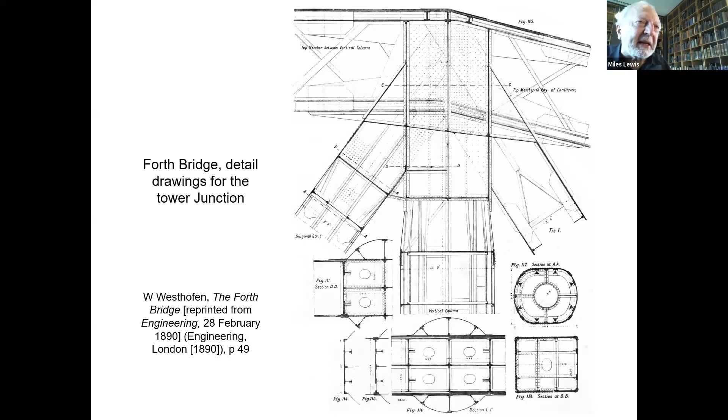You can see you can build out from this very principle, joining an arch together before it's finished—you can just build out from the center to either side until you've gone as far as you want, and those top chords are very much in tension. Now, this could be done because they developed machine riveting, and those little platforms everywhere are where people were working to rivet the bridge together. This was a major development at the time. In that diagram, all those dots are thousands and thousands of rivets being used—they had mechanical drilling and mechanical riveting on a huge scale for the first time.

Now, here's the same principle being used—you see, the coating element is different, but the idea of having a little freestanding section on either end and then a little span in between is exactly the same in this bridge in America. It's a very lightweight bridge in America.

Now turning to steel sections. We talked about the rolling of wrought iron before, which is essentially the same problem, and that's how steel was being rolled, from rough shape to final shape, with usually at first 2 active rollers and 2 passive rollers. A roller pushes in from either side, machine powered, and the rollers at the top and bottom just move as the steel pushes through. They don't require separate power.

If you look at the right-hand side, the attempt is being made to roll a sharper section. Where the arrow is on the left, you can't get rid of that tapering section in the simple rolling process. If you want a more rational section, more like a straight flange rather than a tapered one, you have to develop new means.

One means of doing it is the sack mill, on the right, which was never really a great success. You've got 2 shaped rollers moving on a vertical pivot, with the axis running vertically, rotating, with the sections in between them. The 2 large rollers above and below just move with the momentum. They're there to keep the thing in shape rather than move it forward.

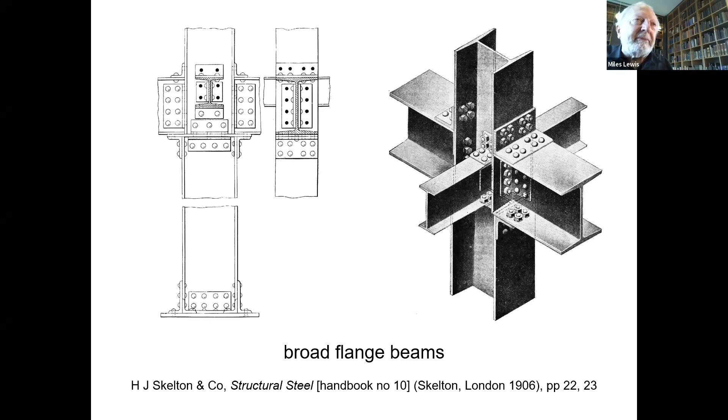Then the joining together - I mentioned the bolting and riveting alternatives. Here's bolting being used in a French building, unusual because mostly you couldn't see this, as fireproofing required it to be concealed, but in this case, for some reason, it was allowed to be seen. Here's a nice railway station terminal in America, United States, which was again bolted together.

But in the Forth Bridge we just saw, all that was riveting, and there's some forms of rivets on the left. Rivets are quite a traditional way of joining things together, even joining leather for shoes, for example. But the development of machine riveting in the late 19th century was a very major change, and it was the basis for many of the early skyscrapers in the United States.

Welding fuses the metal together. You melt enough of the metal together, and maybe add metal to it, to make it a homogeneous section. It can be done either by using gases to reach the temperature, or by electric arc - oxy welding and arc welding are the two main sorts. Here's an example of an oxy welding apparatus.

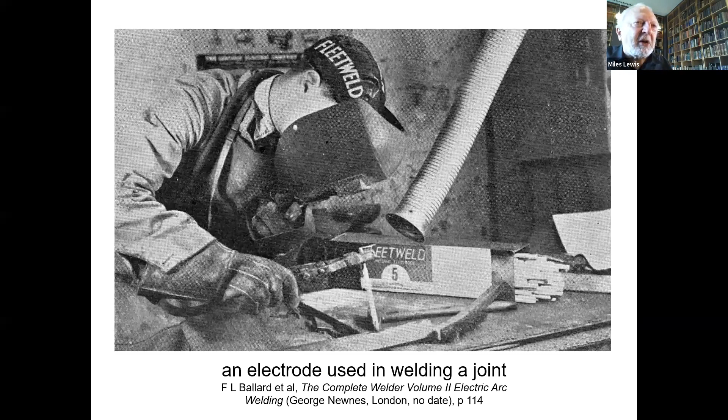There's arc welding with an electrode. And here's the Empire State Building, New York, the great skyscraper, being done by arc welding.

I want to turn to the portal frame, which is an odd, irrational form of structure that became quite significant. First, going back in France to this exhibition building in Paris, not the one you saw before, but an earlier one - the Galerie des Machines at the 1878 exhibition. It's not a conventional arch system at all. How does this one work? What's the structure we're seeing here? Is it an arch? Post and beam? What is it? Like a portal frame, but with trusses over an arch.

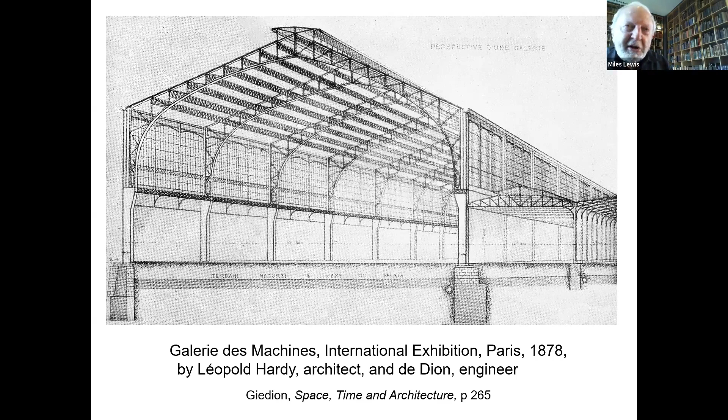What I'm getting at is it's a portal frame. That means the columns go into the ground and there's bending moment transferred into the ground - it's not a pin joint. So it's getting strength from the ground, and the bending moment is continuous right across the frame. It can't be analysed by ordinary simple engineering methods at all - it has to be analysed by models and so on. So this is an early example in France of what you'd now call a portal frame.

And here's a portal frame in a skyscraper in America, the old Colony building in Chicago. In the cross section, you've got those where the arches are. There's a solid flange around the arch, making this a rigid structure, a rigid frame structure.

Here's how it's built. In other words, there are no pin joints at all here - this is meant to be a completely continuous, rigid structure, at least in the major structural bays. The bits in between don't so much matter. This relies on a massive amount of bolted sections to do it, so it's a completely different attitude towards bending moment - which tends to be greatest at the joints rather than at the center of the span, reversing the normal conventions. There's an actual detail of one of those portal arches.

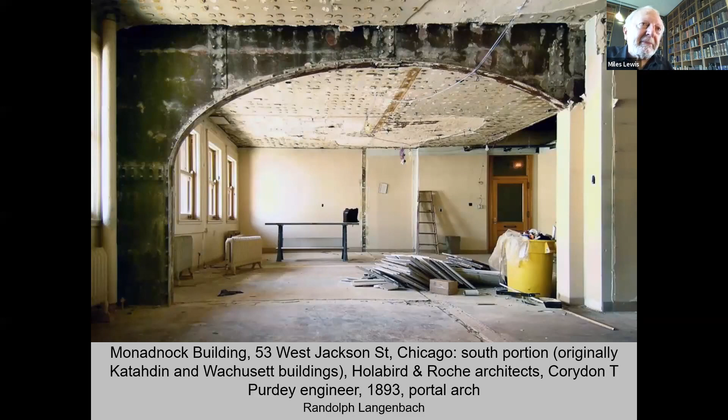Here's the same thing being done, but not with solid spandrels at the side, but with framing - the same thing being done in Arthur Vierendeel's structures in Belgium. Again, you see the girders and the columns don't have any diagonal elements at all. It relies upon the joint to make these rectangular panels.

So this bridge, quite unlike any bridge you've seen before, you can see the flaring out of the joints reflects the fact that the bending moment is strongest and is greatest at those points. There's an analysis of it: no bending moment in the middle, the point of inflection in the middle, maximum bending moment at the joint. It doesn't make sense really in a way - it's extravagant material, but it produces a very nice modern looking structure.

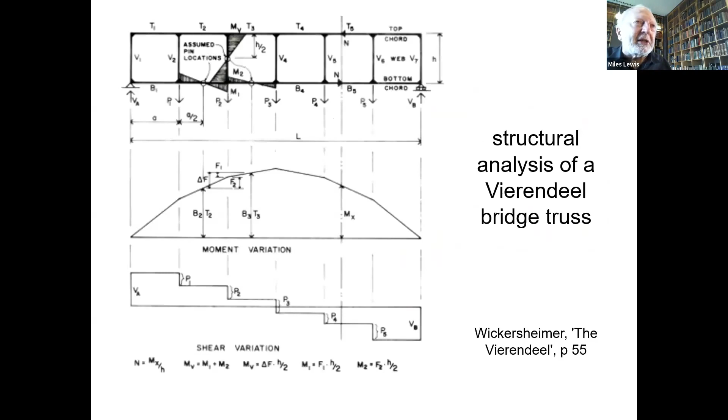And also in some cases, it can function usefully where you need that space to be open for some functional reason. So here you see this is still an arch shape, but it's still a portal frame type structure because it has those rigid joints. Vierendeel built about 36 of these bridges on one canal in Belgium - that's the most famous collection of them. Here it is here. That's a beautiful one.

Here's where it functions. This is an American factory, and because there's no diagonals in the girders, they can take a conveyor belt through the middle of the girders through the factory.

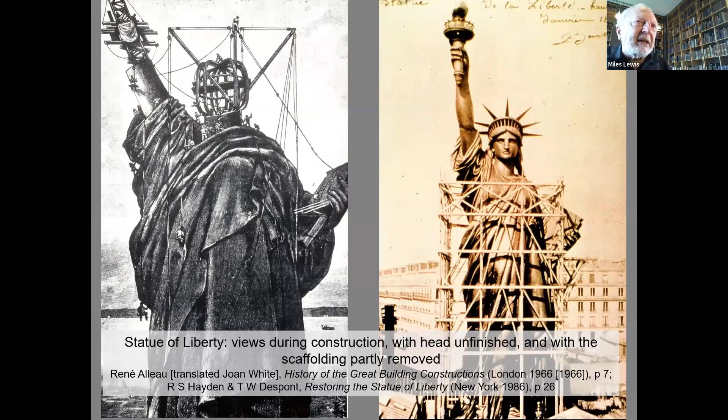Turning to the skyscraper. The skyscraper is largely an American invention, although it has a certain amount of French input into it early on, with the Statue of Liberty, which you may not think of as a skyscraper, but it is. The Statue of Liberty was a present from France to the United States, designed by a French sculptor with an Italian name, Bartholdi, and it has an iron structure within it. It's sheet metal on an armature of metal bars and so on, carried off a basic frame at the middle of it. So there's a sort of pylon up the middle, and then a frame built out to carry the outer face of the sculpture.

And around about the same time is this one in Prague, 1891. Again, all made of wrought iron, not steel in this case, but again a complete skyscraper structure. There's a detail of that.

Now in America, you have up till now higher and higher load-bearing brick buildings, especially in Chicago, big office buildings of load-bearing brick. They begin to introduce into them fireproof floors within the outside brick framing, but still with an outside wall of load-bearing brick.

Looking at this floor here, these are built-up sections, at first in wrought iron, later on steel. There's very little change - often don't know, but this is wrought iron here.

And they're made fireproof by having around the column - look at the column at the bottom - that curved section is pieces of extruded terracotta placed around the column and then plastered around so that there's a completely impervious surface and fire can't get into it. And then between the beams at the left-hand side, a tile arch, an extruded piece of terracotta which slots into the space between the beams, then again is plastered over the bottom, so none of the ironwork is exposed to fire.

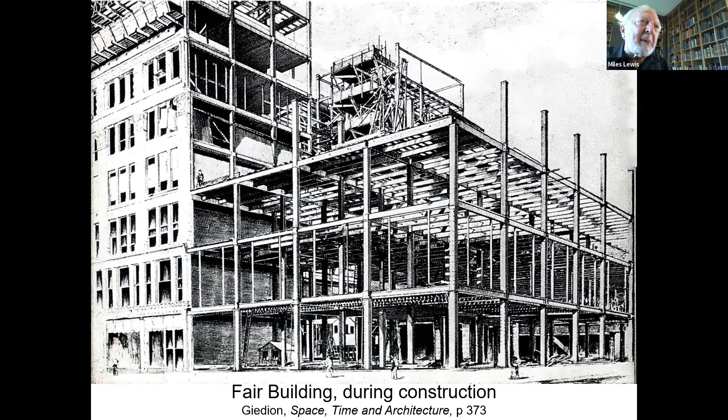What I was about to say is the highest of these buildings, and the one I had in mind is the Monadnock Block, was load-bearing brick to like 17 stories high. The wall at the bottom was over 2 meters thick at the bottom. That meant that you had windows like tunnels - you could hardly get the light into the bottom of the building. And also a very large part of the floor area taken up by the walls, which is very expensive.

So when you turn to a building like this one, which has very thin walls, you've made a major saving. And it's done by having the outer wall not load-bearing at all - it's just hung on to the face of the structure. So this is the first example of what you would now call a curtain wall.

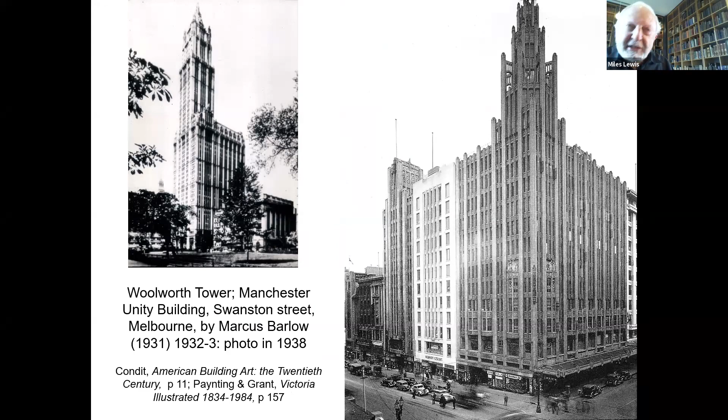The Woolworth building in America gives rise to this building in Melbourne, known as Woolworth Gothic style, because it's the style favoured for the skyscraper. And the Empire State Building, finally in America.

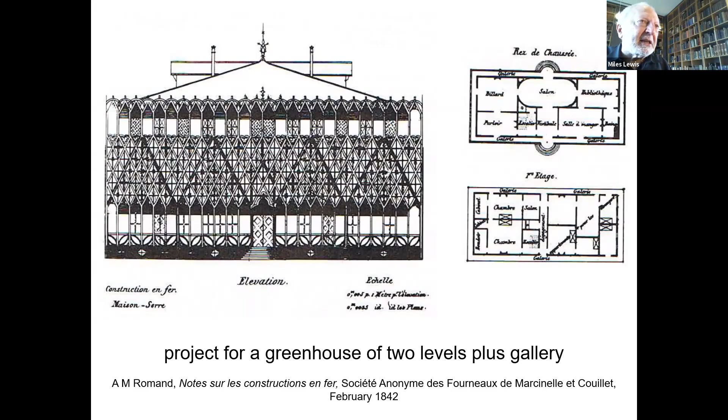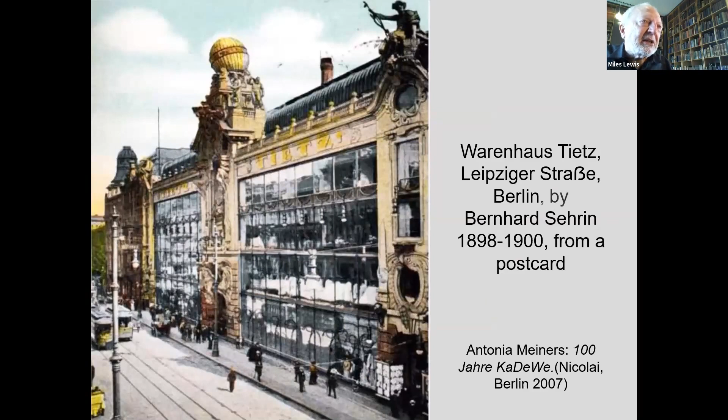Then the idea is taken up in department stores. It's a long demolished one, which is why I haven't got a better picture. But this department store in Berlin has the whole street front in sheet glass to reveal the interior. Then, again in Germany, the idea of making the whole building like that, not just for show, but a whole building like that. So this is a very early curtain wall, in 1903.